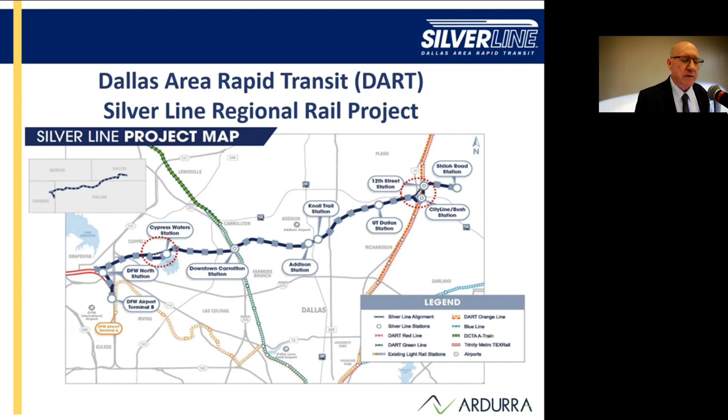And then, of course, we're adding now to the Silver Line basically a 26-mile long hike and bike trail, 10 to 12 foot wide, pedestrian bridges, all H10 loading so they can run emergency vehicles and ambulances on it. We'll get into that in a little bit.

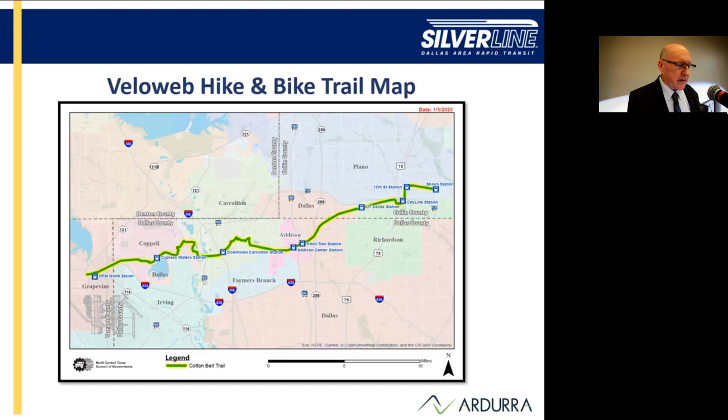Just a congratulations note: the Sunday before we opened, October 24th, was the grand opening, as you know. The Sunday before that, we did a thing out in Carrollton—it wasn't little, it was kind of big—where we brought in everybody that worked on the job in the past and currently, and their families, and let them ride the train, with music, speeches, food, and whatnot. So here's your welcome to the Carrollton and the Silver Line. You didn't get the balloons, but you got them now.

So a couple milestones: the notice to proceed was issued in January of 2019, and the design started right away. First concrete pour, which was a crash wall just to get some concrete in the ground, was in 2020. Then major construction began in all disciplines—we'll get into some of those details in a little bit—and design is still underway.

Going back to my statement about what makes a rail project—well, sometimes you got to destruct before you can construct. This was the White Rock pedestrian bridge, an old 1906 historic bridge that we went out and tried to sell for like $1. Everybody said, well, we'll take it, we'll take it. And I said, okay, but you got to move it, you got to cut it up, and you got to reconstruct it.

And then they said, well, maybe that's more than we can handle. So anyway, we had to move the rail. We used a SPMT, a self-propelled modular transporter, to remove this White Rock Trail.

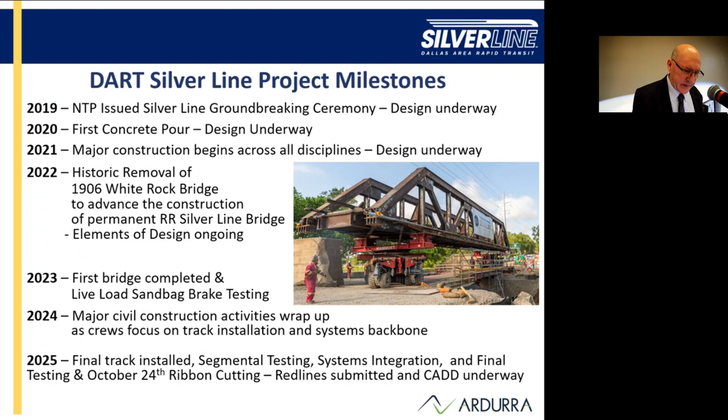All right, so some facts. $2.1 billion - sounds like a lot of money. It is, right? But it's well worth it. And I can say that this project, as opposed to other similar projects around the country, was actually right in there - not competitive, maybe even a little less expensive.

So that's good news. One of the things we're most proud of is that to date - just a couple weeks ago - over 6 million man hours out in the field with a recordable incident rate of 0.62, as opposed to national average of 2.4. So we're very happy about that.

Our OCIP, Owners Controlled Insurance Program - the carriers, the underwriters, are very, very pleased. And we got everybody home. That was the biggest reward from this job - keeping the people's safety, and they knew they were safe and were looking out after one another.

All right, so overall, I said 26.7 miles of rail. That's actually 281,000 lineal feet. Remember, this is a double track job for the most part, so do the math - that's 53 miles of track.

36 bridges, 10 stations, 750,000 square feet of noise or sound wall, betterment walls. Got some pictures of that as well.

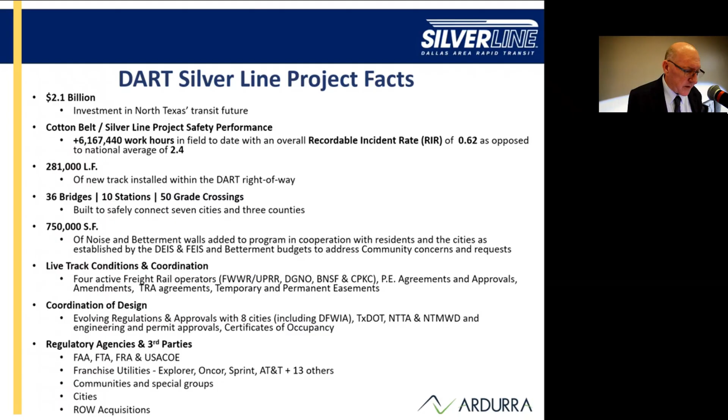Okay, so again, what's a rail job? What's part of the cake that makes a rail job? We had major storm drain public utilities, up to 72 inches of new storm drain, and consistently along both sides of the alignment, 12 inches to 24 inches to 3-foot storm drain all along the railroad to deal with new flood control regulations the city came in with. We had to upsize our pipe in many areas from old worn-out class 3 pipe to upgrade to class 5 pipe. We also had water lines we had to relocate and run bypasses on to keep people with water.

I mention this because after all the testing, coordinating with the water districts throughout the alignment, just the scheduling of their inspections sometimes didn't really match the schedule that we wanted. So again, trying to have that collaboration with them, working together night and day, seven days a week, whatever made sense - that's what we tried to do to accommodate the third-party owners and the public utilities.

All right, and then traffic signals. In order to do this job, initially it was a single track all the way through - some of it not used, especially through the city of Dallas, but through Coppell, Carrollton, Addison, Richardson, and Plano that's all there was, existing single track. So we had to move that track, and we went to a double track where it was just a single track before. So all new traffic signals, all new temporary ones just to keep building until we got into the permanent signals in place and up and running.

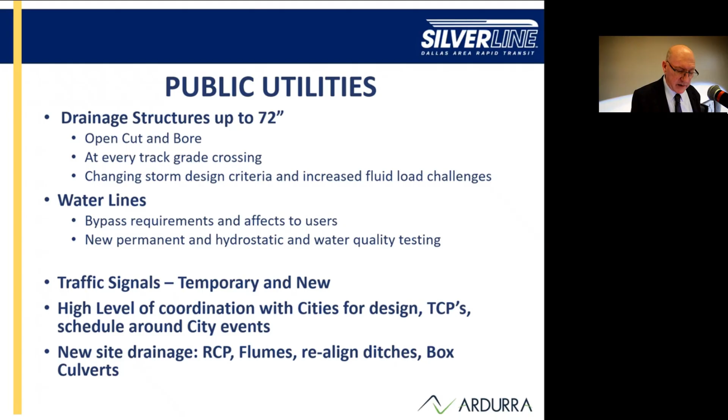And then again, I mentioned drainage. So we had all kinds of drainage - I've got some pictures of it: concrete pipe flumes, relining all the ditches, box culverts. And again, there's no rail on the job yet.

So this is an example of a lift station we had to put in at Hillcrest in the city of Dallas, where we depressed the track, or depressed the road, so the track could go over it. This is a lift station that we built. So there's some boring here - that's storm drain. And then the picture on the right is the finished condition of that.

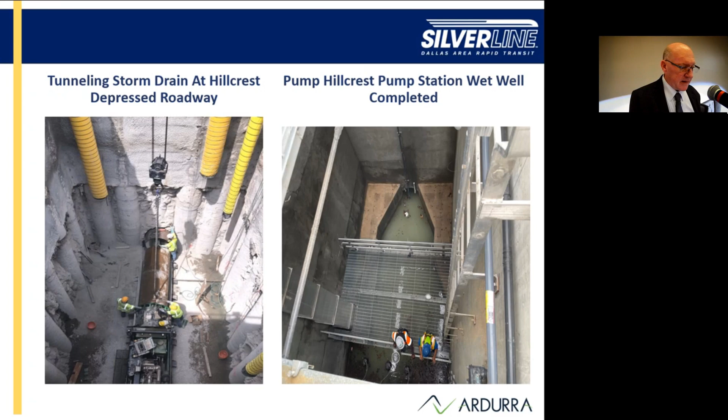And then the typical storm drain - you see this is 3-foot class 5 pipe, and you can see some of the 72-inch storm drain. We also had force mains on this job, wastewater force mains and whatnot. This is right under Coit Road. We had to relocate all this storm drainage, upsize it, mostly because we've got a bridge going over it. In order to fit that bridge and all the drill shafts where they needed to go, we had to do this pretty large and substantial relocation.

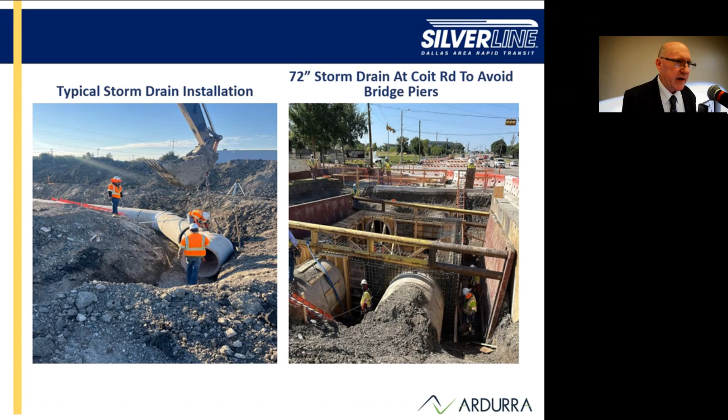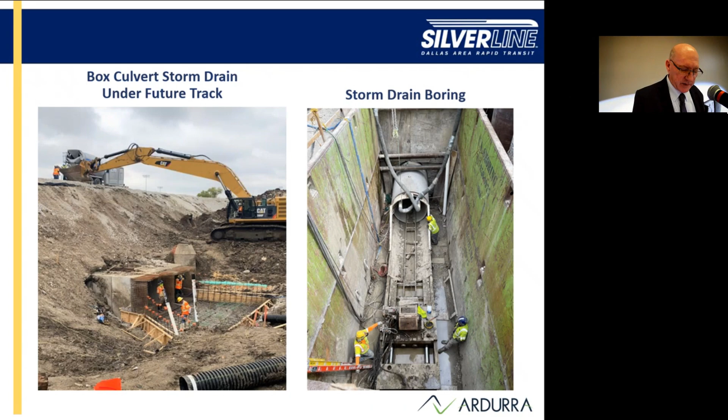So just a few examples - I used some of the most critical or complex ones. All right, so franchise utilities: as I mentioned, we had 98 utility relocation packages on this job. In other words, we replaced almost every utility on this job - there was not one that I believe we could keep in place. We replaced Oncor, AT&T, Atmos Gas, Sprint. We had 17 different franchise utilities that we had to relocate. So just kind of a little joke - how many potholes did we do? Anybody want to take a guess?

No guesses? I would say over 100,000. So that's costly, it's time consuming. And then what happens with potholes, you go in at the very beginning when you're doing the design, you do your potholes, you think you got everything. Two years later, three years later, in case of a long-term job, we go out there, those potholes aren't around anymore. So you have to almost pothole again. So anyway, budgets are a pretty big item there.

So you can see there's a cost of around $100 million for all these franchise utilities. And that whole sequence of franchise utility relocations probably is 2.5 years worth of work. A lot of that work had to be done before we could even start rail and even storm drainage. As you can see, 10 miles of new Explorer and Atmos gas. Then when we relocated a lot of that work, the old pipe was all asbestos, and we had to remove that. That was kind of unplanned for, but we had to take care of it.

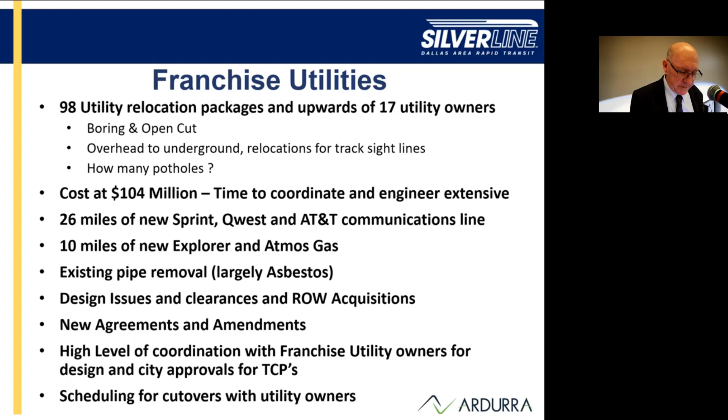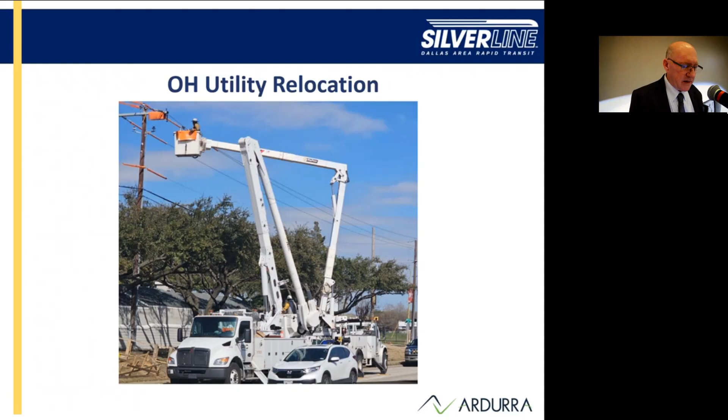All right, and then this is kind of my fun stuff, is retaining and noise walls. So we had basically every type of wall out here. One thing we didn't have in here, we had a shotcrete wall too, but your typical MSE walls, T-walls, soil nail walls, crash walls, and noise and betterment walls. 750,000 square feet of noise and betterment walls. I'll show you a nice little picture of those.

So some of the lessons learned, especially just because of schedule delays when you start a project, it's just a wall, right? But every city wanted a different color, wanted a different texture. And we put out polls, and so we get votes, who wants this, who wants that. And then the city would come in and say, no, this is what we're going to want. I mean, if you just put out a whole bunch of designs, all these residents are going to just pick a myriad of different ones. So we had to kind of force their hand and say, no, you can only have this kind or this kind or this kind.

These sound walls, I'll show you a picture in a minute, but they are a special fabrication or manufacturing process. We set up a manufacturing plant here in town to build them. So they're cast in a mold. And then we sprinkle these wood chips on top of them that have certain sound absorbent materials. And this type of wood only comes from South Carolina. So it's like cutting down a forest to build these walls. But I'll show you some pictures.

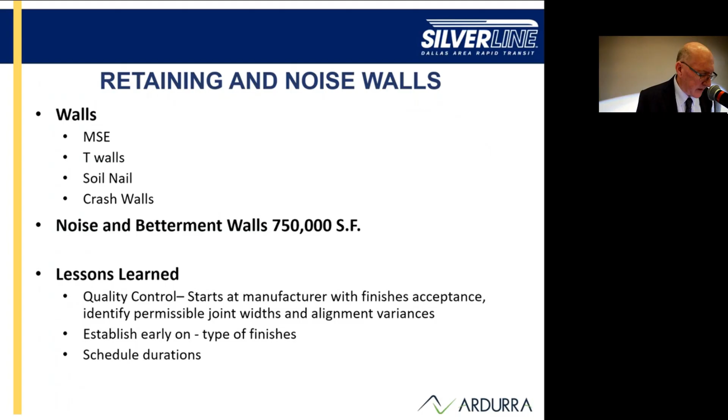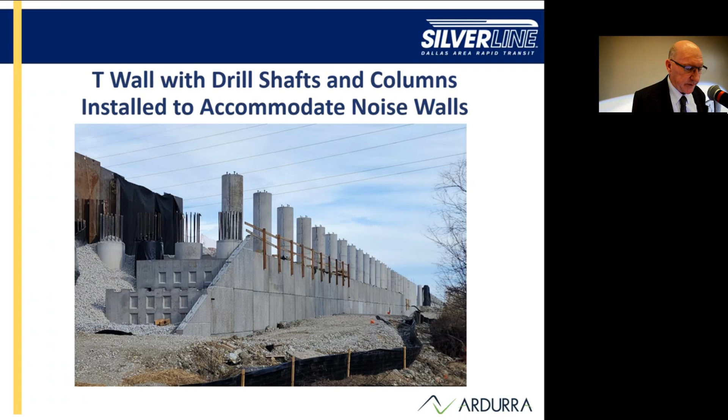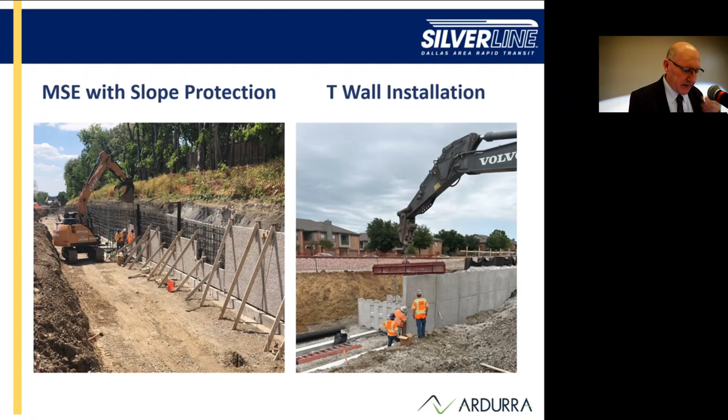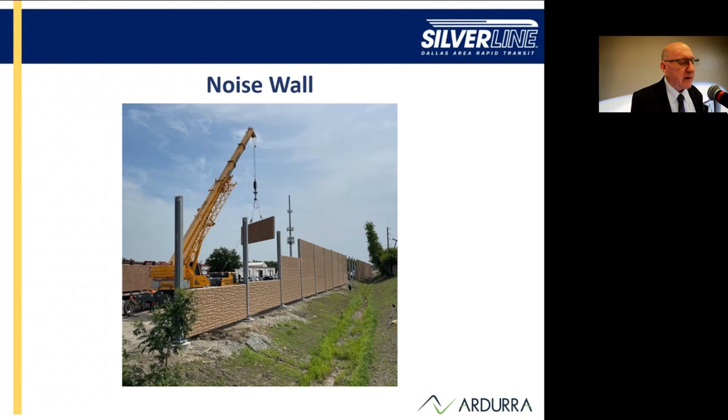And then another picture of the T-wall installation - they don't go fast. And here's a sound wall. Each one of those panels being hung right there, they're 15,000 pounds a piece. Typically they're 3 foot tall. You put them in, stack them on top of another. Doesn't sound that hard, but it takes a while because there's a lot of footings, a lot of leveling. Some are sound walls and some are just betterment walls that have no sound to them. But throughout mostly City of Dallas, Richardson, Plano, even here in Addison, Coppell, and Carrollton, we had many walls as well. So some samples of walls.

All right, so bridges. I think I mentioned we had 36 bridges. A lot of these were like brother-sister bridges - we could build one side, then come back in and add the other one. They were separate and independent. So in other words, when I say 36 bridges, might as well make it 52, because they weren't all built at the same time. So we had several different types of bridges.

So where we had existing freight railroads, we had E80 loadings, so of course we had to have a more substantial bridge on that. And the train itself, the Silver Line train, only requires an E60 loading. So we had your traditional drill shafts, and we did another type of construction called auger cast piles. If you've never heard of that one, you might want to look into it - it saved the heck out of our schedule. In other words, one drill shaft might take a day, and I was getting 4 auger cast drill shafts a day. It really helped us on our schedule. You ought to look at that - I've got some pictures of it coming up.

And then typical box beams, bridges, through plate girder type bridges where we had low clearance elements, and the typical TxDOT post-tension girders with metal deck. We had some box culverts and some arch bridges as well.

And then we had one other bridge, a pedestrian bridge over Coit Road. If you all live out in that area, you know where that's at, and that took forever. But we got it done and opened up on October 20th of this year.

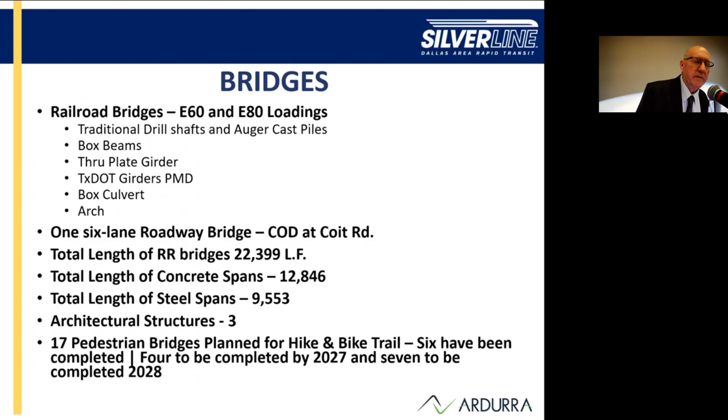And then, as I mentioned earlier, we had this new hike and bike trail going in - we got 17 pedestrian bridges on that. They're pre-manufactured, pre-built, if you will, weathered steel bridges. So we've got 6 that have been built, 4 more going in or under construction now for phase 2 hike and bike, and then phase 3 there'll be 7 additional ones going all the way through Carrollton, Coppell, down to Grapevine, is what we hope.

All right, so some typical bridge constructions in flood zones - you can see the picture on the left.

This is one of those things we didn't really plan to use 2 cranes out here, but we had a weather event, and this is the Elm Fork of the Trinity River. They're in the city of Carrollton, and we had this flood event and it started eroding everything away. So we hurried up and overnight brought these cranes in, got them surfaced and on crane mats and built the bridge. We worked, I think, 28 hours straight just to make this happen because we could not predict what that flooding was going to do or where it was going to go.

Picture on the right is an example of an auger cast pile bridge. You can see on the left, the auger bit, it goes pretty fast. And on the right-hand side, in the middle of the picture, that's just an I-beam. So you drill a hole, sink the I-beam down there, pour it up with the grout slurry type of mix. The first couple we tried to do, we were having a hard time getting that mix right, but once we got it, we just sailed. Anyway, it's a really nice project, and we actually were able to get E80 loadings on this.

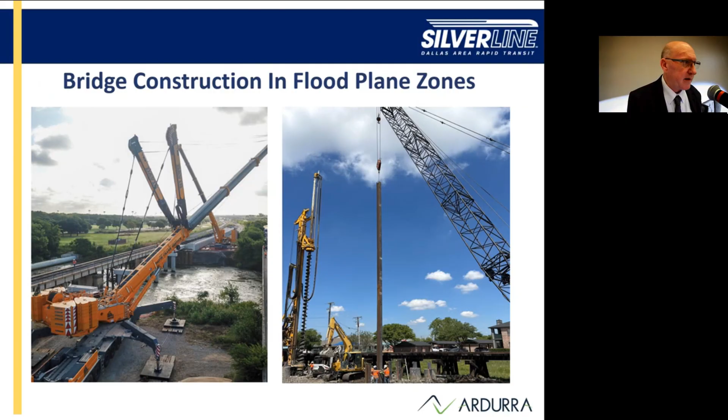And then another bridge, this is over US 75, so a combination of box beams and TxDOT girder bridges. That's a mile-long bridge, City of Richardson, over by the City Line Bush Station. And you can see on the right-hand picture, that's the girder bridge after it was completed over US 75, where we had to close down US 75 overnights for 4-hour periods just to build this bridge. I think it had 6 different spans on it.

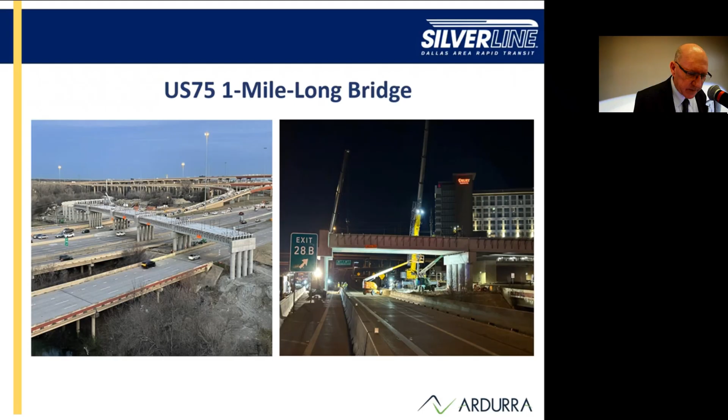So here's some of the architectural enhancements that were requested by everybody. In this case, this is the town of Addison. This is an arch bridge that we built, and you can see the bridge, the bents down below there. We're building this arch so we can install the box beams on top.

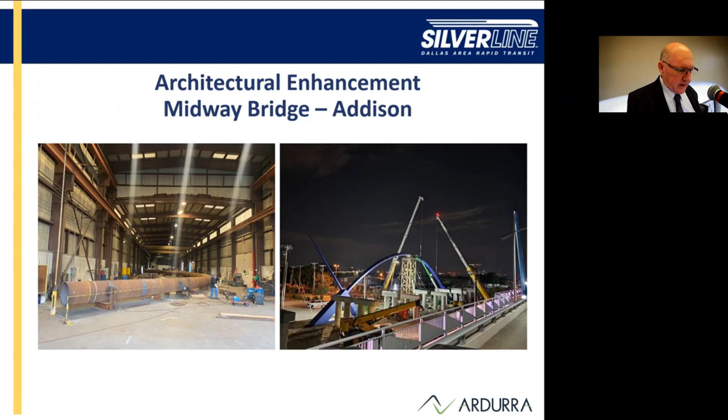And this is kind of a little arch bridge. The city of Coppell, they didn't like... some people don't like the looks of weathered steel. I don't know why, I think it's beautiful. But they said, hey, this is right next to the Beltline Road, we want something that kind of looks nice, so we did this as well, put this little arch span in there.

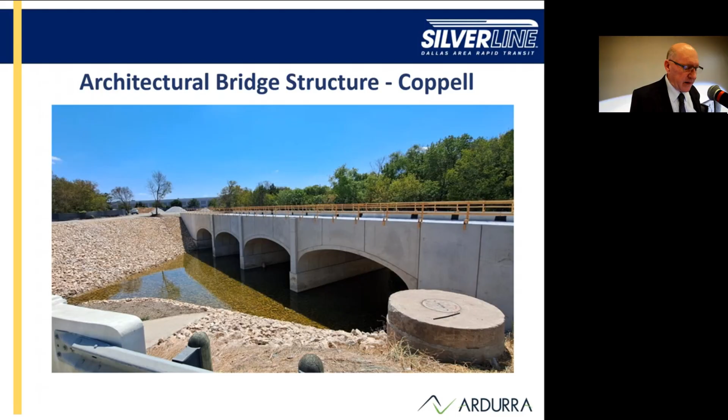And then some other aesthetic embellishments. This is in the city of Carrollton, over Josey Bridge. So a through-plate girder bridge there. But they said, well, we don't like, again, that color of that weathered steel. So we went in and added some columns and some programmable lighting and then a fake facade on both sides of the bridge, so it lights up at night. It looks really, really nice. And then, of course, landscaping all underneath it. But it beats the heck out of what was there before, which was an at-grade crossing.

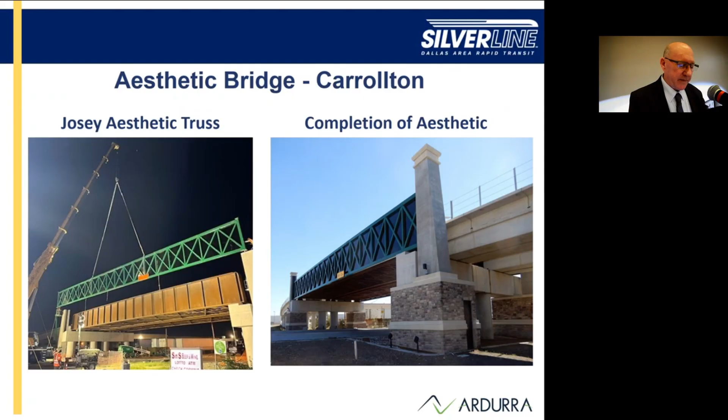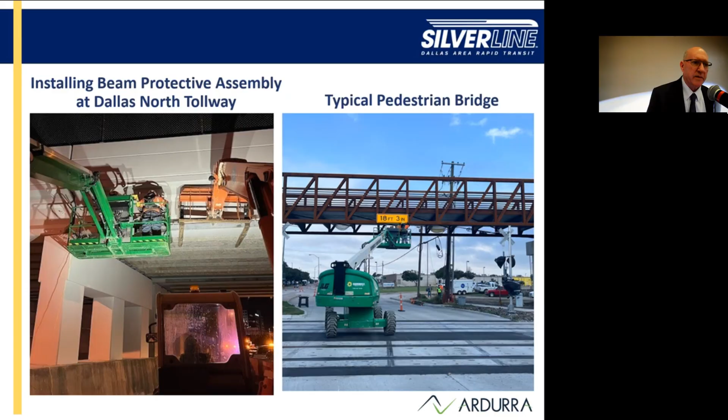So in this case, we were able to build a bridge, and so traffic thoroughfare should be a lot nicer now for the city. And then the picture on the left is just call it protective assemblies. It was basically hanging signs, height signs. This is over DNT. And then you can see a typical pedestrian bridge on the right, which has certain loading requirements so we can run ambulances on them in case somebody gets hurt out there, so we get good first responders out there to take care of people.

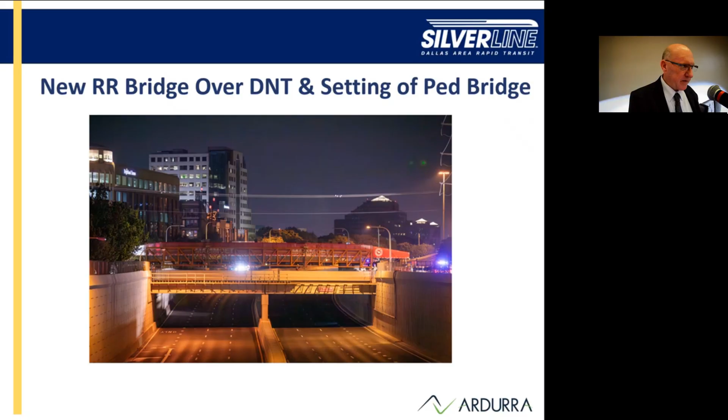And then this is DNT. So we closed down all of DNT at night, built a railroad bridge, and then we moved in and pre-assembled the pedestrian bridge and moved it in with the SPMT over one night.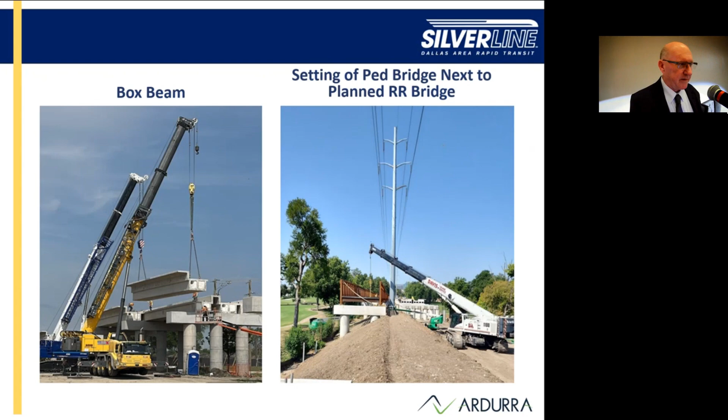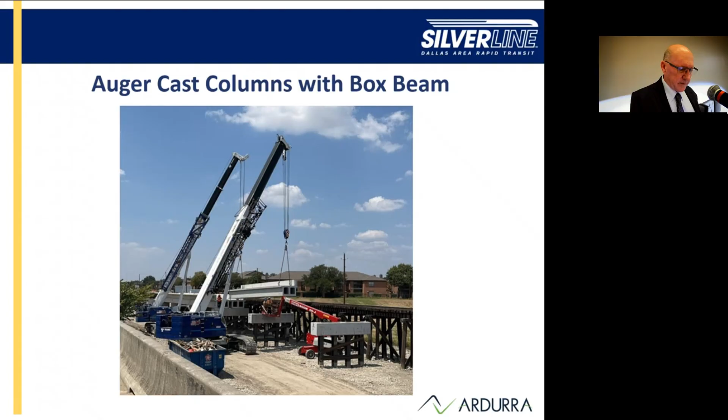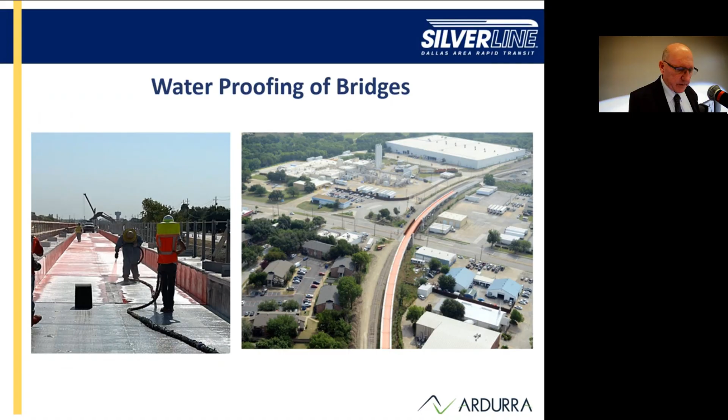So we had to use low cranes and basically a lot of scaffolding to build it. Couldn't call up Oncor and say, turn the power off for 2 days, will you please? And they said, no, we're not going to do that. So it's just some other little puzzle pieces that you have to figure out. And then this is one of those auger cast drills, bents you can see, and then with some box beams. And then to finalize the deck, waterproofing over all pedestrian roads and any creeks or rivers as well. Stations, we had 11 stations on this job.

So 2 at DFW area, 1 at Terminal B which already was there, we just modified it a little bit. The North Station, still DFW area, Grapevine area, Cypress Waters, Carrollton, 1 station in Carrollton with access to the Green Line by installation of an elevator, Addison Road, Dallas Knoll Trail, Richardson UTD and City Line, and then Plano, 12th Street at grade, and 12th Street aerial to connect to the Red Line LRT, and then at Shiloh.

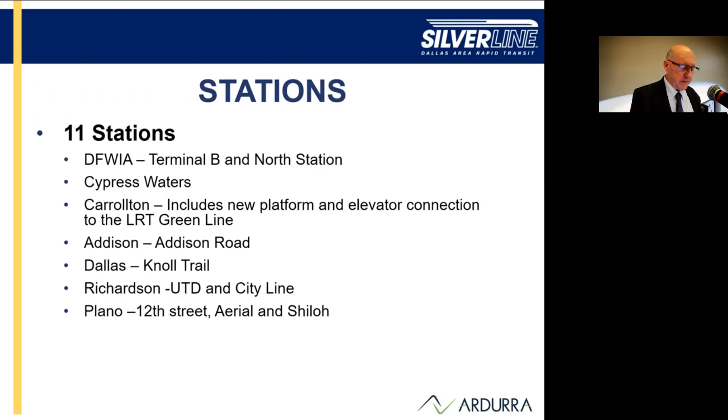All right, so just a couple pictures. I'm not going to go crazy on pictures.

How many have ridden the Silver Line? Show of hands. A few more to go, huh? So I'm just going to encourage you, go get on the Silver Line and you can see the final pictures.

I'm just showing the build process, if you will. Basically it starts off with grade beams, picture on the left, you can see Carrollton, and then 3 years later you got a finished station.

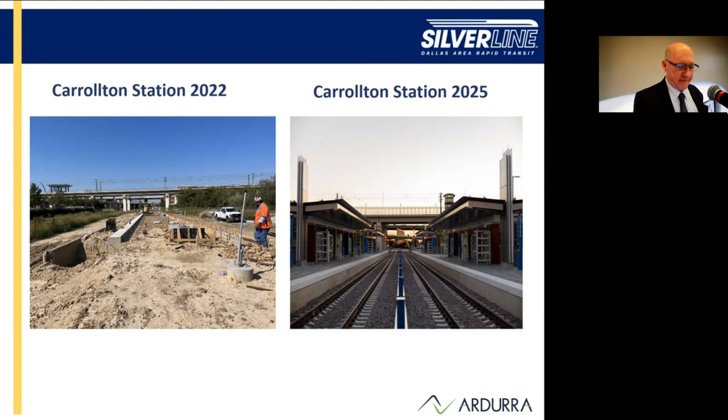And here's, I'm probably going to get shot for this. How many architects in the room? Good. They're not my favorite crew right now, right? So when we start the designs on stations, everybody wants, there's arts and design budgets, and we want every station to look different.

I think they sometimes really get very creative without great understanding of what the actual costs are and the time it takes. A lot of these elements, for example that column on the left, is lit at night. It's steel over a plexiglass panel, and it gets adhered, and it's never been built before. So it took a long time just to get it approved and get it built. No one in the field had built one before, so we don't have the craftspeople used to this kind of stuff, and it takes a long time and a huge punch list process.

And the picture on the right is another one. Somebody had this idea at Cypress Waters, all about the blue wave and wind effects on water, so somebody came up with this epoxy compound. It looks really nice when you do it inside, but trying to do it out in the field with dirt blowing and weather, it makes it tough. We put this down and then water gets on it and it's slippery as ice, so we had to go out there and grind it down to fix the coefficient of friction. It really looks good from a distance or an aerial view, but when you get down to it, it was very costly and very time consuming.

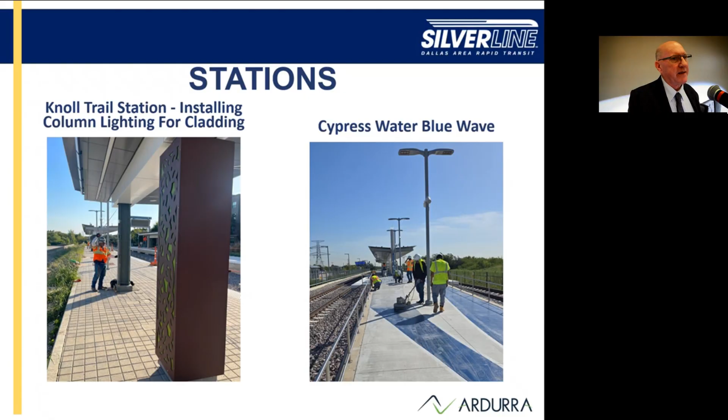And we still got to do some more work on it. Then some other stuff, I mentioned we added 3 elevators, some pretty extensive stairways and elevators on the job. This elevator goes to the Red Line LRT. We got those done on October 23rd, the day before the ribbon cutting, so it was sleepless nights getting this done, crews working around the clock.

I'll also point out the picture on the right, you see those diagonal light things underneath there? I'm not complaining, but in order to replace that light, I have to take a lot of that stainless steel cover off. You don't just go up there, pop it out and pop it in. So when we do a lot of artsy things, I just want to build, I don't want complications. When we're under design, let's really look at the maintenance costs and bring in the operations groups early, so when they start looking at this stuff they're going to go, wow, I'm going to have to add 5 people just to replace light bulbs on this entire job. 5 people to the staff, sounds crazy doesn't it, but it's real.

So I've learned that on TxDOT jobs: bring the operations and maintenance people in early in the design. If you're not doing it, you should maybe think about it.

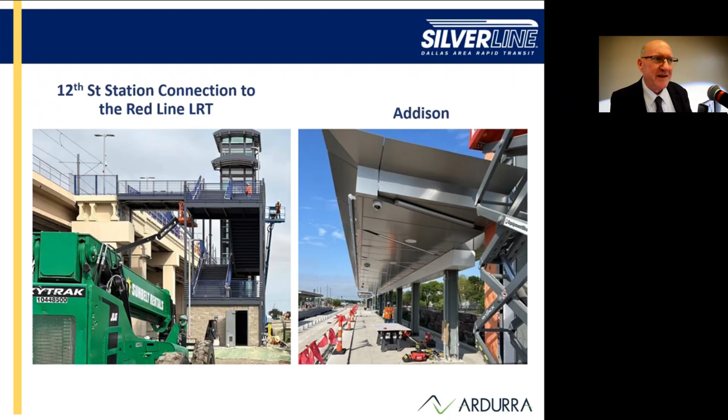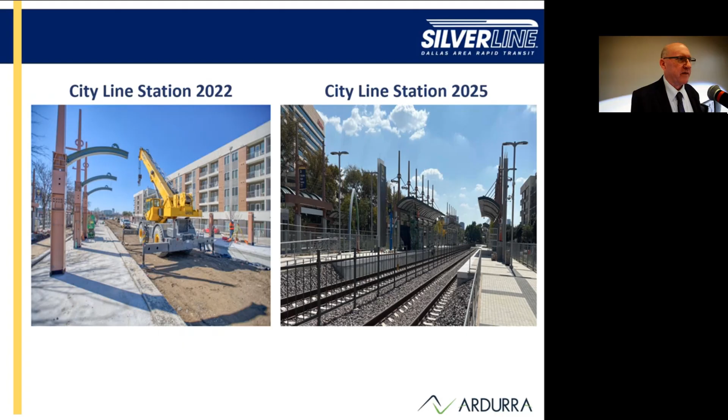Looks pretty cool when it's lit up at night. And then we get these little arches, these green looking arches in here. Those weren't the easiest thing to do. They look great on paper.

It took some while. And then if you go up from the Silver Line or the LRT red line, you can go up to the LRT station. We just finished this station, picture on the right. You can see some of the arts effect in the background towards the right-hand side of the picture.

This wavy thing, that's edge fencing. As always in a lot of jobs, all of a sudden manufacturers go out of business, or they don't get it done, end up in the queue and you can't get the galvanizing done. And you go inspect the galvanizing, it's not good enough. Then you go back to the back of the queue again.

So again, this is all about material procurement, making sure all materials are in place and ready to build when you can, because when you have all these other potential impacts, whether utilities or whatnot, you want to build somewhere. So a lot of times that takes manipulating the schedule back and forth.

The contractor is responsible to manage and mitigate schedule. It's our job too, as owner's representatives, to make sure the job's getting done, all the materials in place, meets the quality and on schedule, and not being overbilled. So it's important on a big job like this to get all your materials, your long lead materials, as soon as possible, and then shelter them accordingly. Just don't leave them out in the weather.

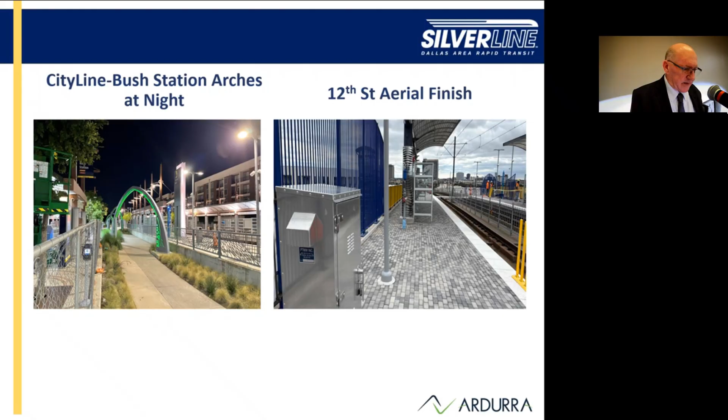So just a few lessons. Okay, now the fun part. So all these pictures you saw, some track - 26 miles of track, right? 11 spurs, shoofly tracks, temporary and permanent, to keep the freight rails running. Of course long lead items, 6 to 8 months for crossovers, turnouts, and switches.

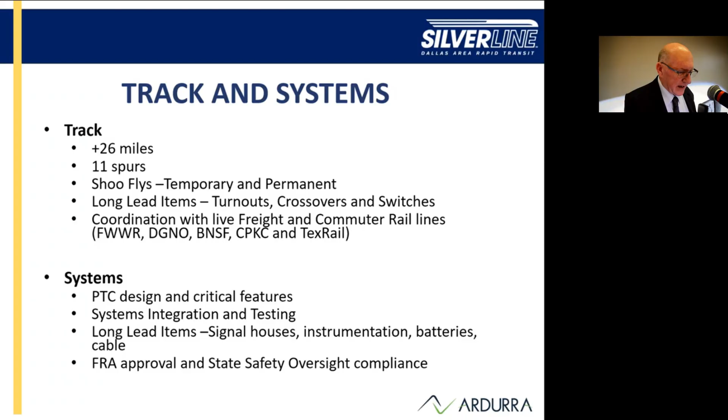And then again, coordination - I can't emphasize enough how much coordination is involved in keeping freight railroads running while you're building. Okay, and systems, well, it goes with everything, right? Systems, PTC, systems integration, systems installations.

I've got a few pictures to show you. These pictures right now just show you, we work rain - track guys, they don't go home when it rains, they don't go home when it's cold, they don't go home when it's hot. They work 24/7 where necessary.

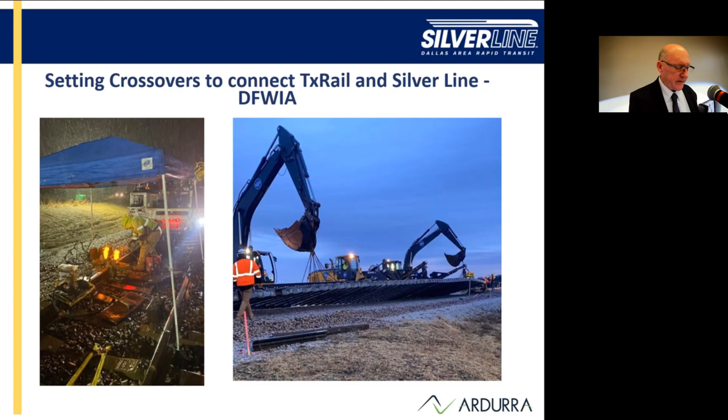This happens to be one of our first welding exercises we did out there by the DFW area, and then bringing in a crossover on the picture on the right. This was early morning, just before dawn.

Just some samples of the track out on the job. These are crossovers - a lot of crossovers, so we can share track back and forth with one another, with the freights, with a northbound train or a southbound train or westbound train, eastbound train. So they're necessary, a lot of crossovers. And there's a lot to track, don't get me wrong.

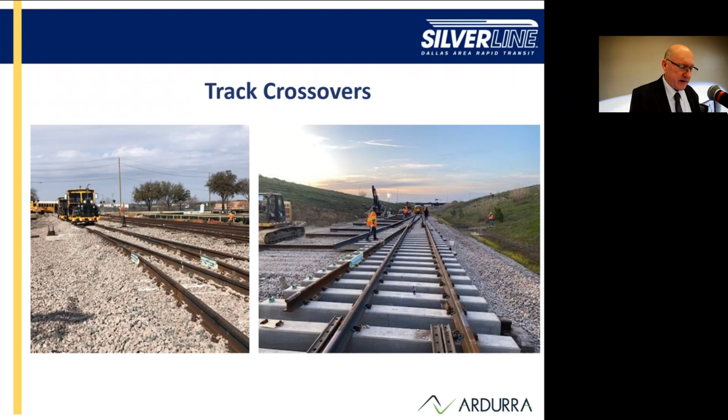And here, for example, here's one of those work windows we had. I had 14 hours. We're coordinating with DGNO, BNSF, our rail, Silver Line Rail, and Fort Worth Western. Had 2 double diamonds to put in, new track for BNSF, our Silver Line Rail, plus new track crossing and rail for Fort Worth Western to keep them operational. It's 14 hours, so we stack people up.

And we gave ourselves a 2-hour cushion, and by gosh, we made it. So that's one of the great successes. Nobody hurt—that's another thing.

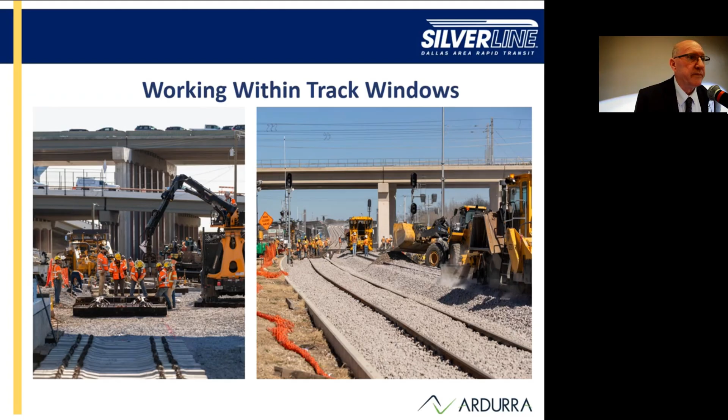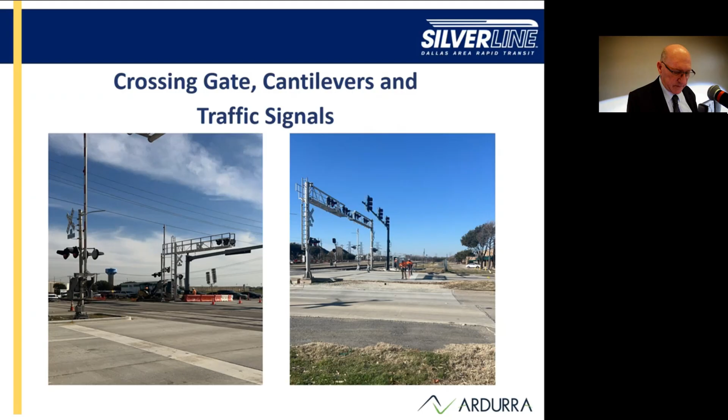All right, just some typical pictures of at-grade crossings. You've got your gates that go down with the trains, you've got your signals, cantilevers for the train warnings, and then brand new traffic signals. And of course the at-grade crossing itself, brand new.

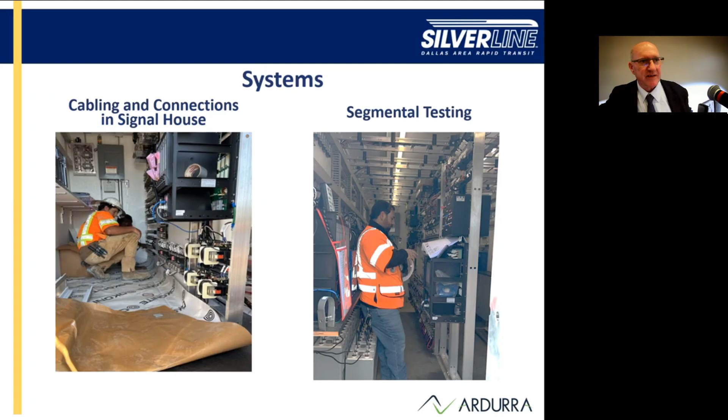I'll go real quick, I know my time is limited. So, 50 at-grade rail crossings—I showed you an example. For these at-grade crossings, putting everything together takes 10 to 12 weeks per crossing. Why should it take that long? It really shouldn't, but if you can't get a full closure, you can only do partial closures, and you only can work in 4-hour windows.

That adds time. In other words, I can't work during rush hour traffic—I have to open up for rush hour traffic. And just to pull new track, new subsurface, new utilities through this area, new systems work through the area—it basically averages out to 10 to 12 weeks per crossing.

So you've got to get those started right away, as soon as possible. Then, at a high level, coordination with traffic control plans—installing temporary traffic signals well in advance, keeping the active freight rails running, and transload agreements. If there's nothing else you can do and you can't keep the freights running while working a certain section, you set up a transload agreement where the train parks off the alignment, you go in with semi trucks, unload the trains, then use rubber tire transportation to bring them to the customer that the freight owner usually ports to.

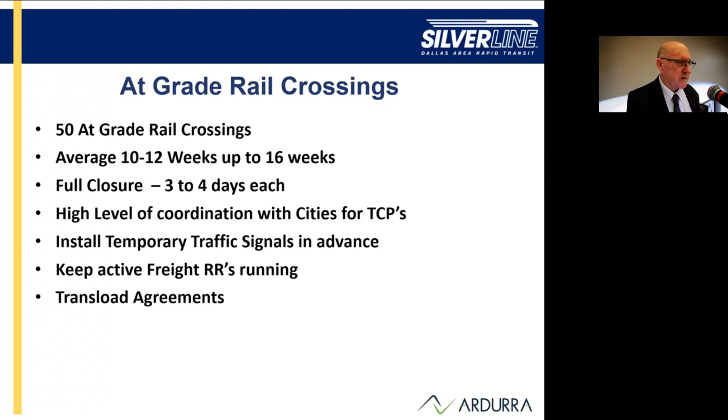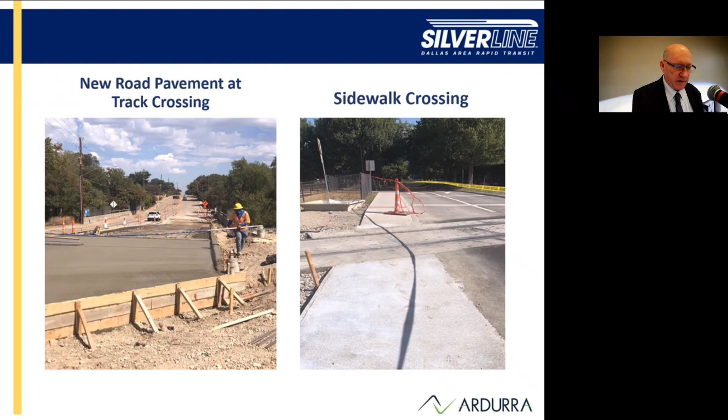And then just on at-grade crossings—remember, it's not just the crossing where the train goes through, it's actually new road, because we've changed the line and grade horizontally and vertically. We have to come in and replace existing roads. And we always have sidewalks, TDLR, and all that kind of stuff that goes with it.

And that's pretty much my conclusion to this meeting. Sorry I went so fast, but I know you guys are setting up for lunch.

So I do have a few lessons learned, if I can, just real quick. DEIS, FEIS—it's so important that the right people are included in those. People with education who know how to build things, versus just a bunch of dreams. But it's a prolonged event.

Then when you go to build, you'd better know your contract. You'd better know what the FEIS says, because if you don't, you're going to get called out on it. So that's the lesson learned that I use for all my guys.

And of course, design, utility adjustment agreements, right-of-way acquisitions, quiet zones—another thing to get started on right away. Stakeholders—know your stakeholders for each city that you're going to be turning your plans into, know what really makes them happy. And then risk positions and prioritizations—always know what your ultimate risks are, your most critical risks. I always like to say I've got to keep 5 top priority items.

Always, even today, even though we've got the Silver Line open, we're still doing some work—I still have 5 top priorities. So anyway, those are my lessons learned in a nutshell, and that's all I got.

Any questions? We've got time.